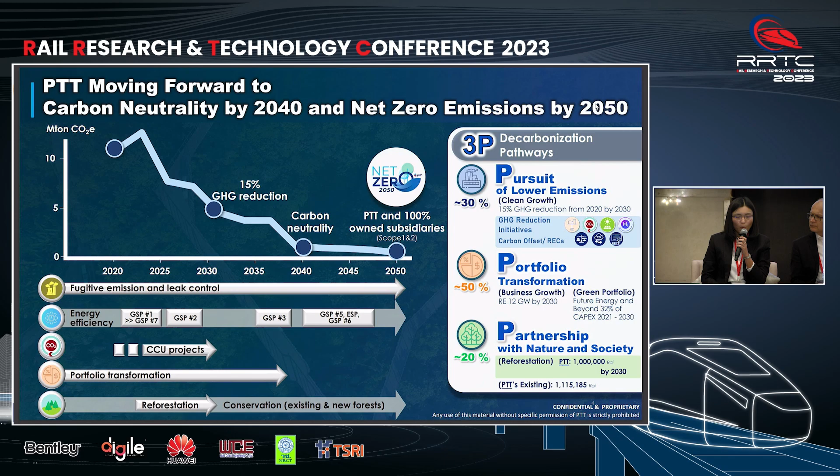And the last one, we would like to be friends of the environment, or friends of nature, with reforestation. We have targets for 2 million rai by 2030, but right now PTT itself has already achieved 1.1 million rai this year.

Coming to the initiative projects that have a big impact in reducing CO2 in our group: the first one is CCS, carbon capture and storage. This project will be a pilot project, starting by 2027, led by the PTT subsidiary called PTT E&P.

Followed by CCU, we try to study ways to utilize carbon dioxide, such as use in valuable products like sodium bicarbonate, animal protein, methanol, and so on, that can make more valuable products for the markets. And followed by renewable energy.

Of course, you know solar is very popular in Thailand right now, and also some wind, combined with clean fuels. That is a very hot topic today, about hydrogen, which can be used as energy for many economic sectors like transportation.

And the last one is reforestation. As I said before, we have targets for 2 million rai to plant trees for Thailand.

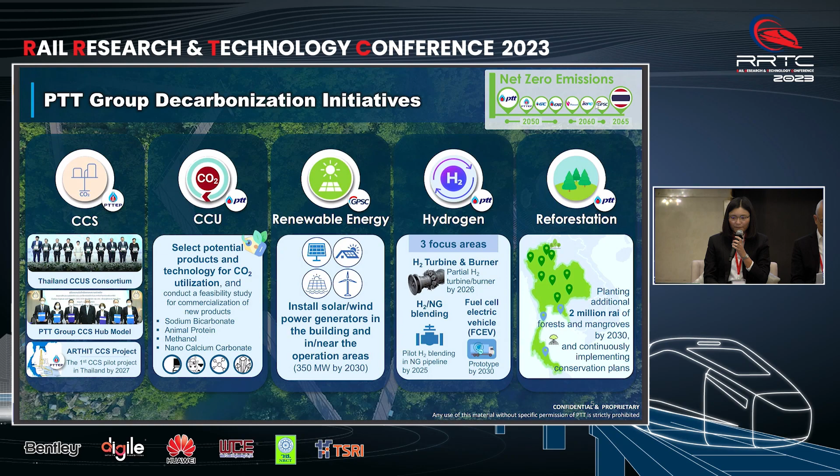This is an overview of the initiative projects, and the PTT innovation that supports the PTT group to launch products to the markets in Thailand. Of course, we are the oil leader in our country, and in this country we are also the leader in biofuels and bioethanol.

The bio fuel produces less CO2 emissions, which is better for the environment. That's why we try to develop this to support existing technology, as well as for aviation.

What we're doing is thinking about biojet, or SAF, sustainable aviation fuel, which is a very important thing to reduce CO2 in this sector.

So we have signed a memorandum of understanding with our PTT group to study, develop, and invest in biojet production in this country in the future.

And the last one is all about hydrogen, which can be used in many applications. Let's come see the detail.

This is an example of a project that the PTT Innovation Institute does for road transportation — testing biofuel tailpipe emission reductions in our company.

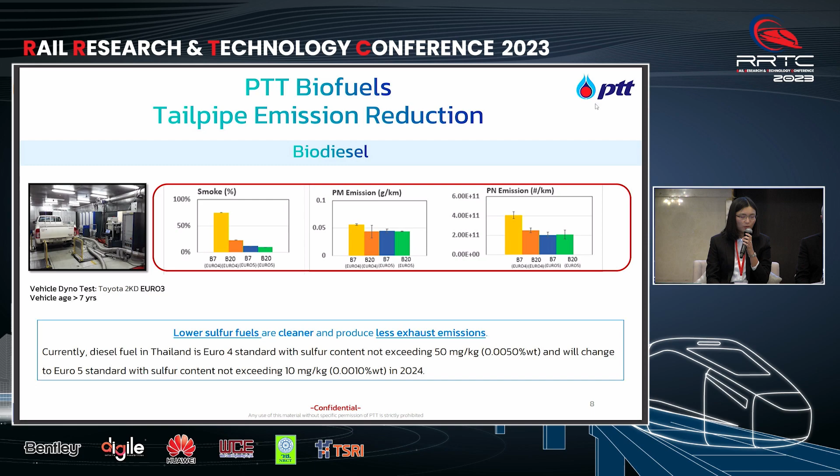This shows you the result. For B20, more bio content means it can reduce CO2 emissions further — about a 15% reduction compared to diesel alone.

Now coming to aviation — we were the first to cooperate with Thai Airways, 12 years ago, to use biofuel produced from used cooking oil, the first in Southeast Asia and in Thailand.

That confirmed biofuel can work with existing aviation technology right now. And this year, because of ICAO standards, the whole world is being pushed to use biofuel for CO2 reduction.

The ICAO standards require the use of biofuel for CO2 reductions all around the world, so the question is how we can provide biofuel in this country.

As I said before, our PTT group signed an MOU to study, develop, and invest in SAF in the future, to support biofuel in Thailand as the region's aviation hub.

Why did we use used cooking oil at that time? You can see the life cycle assessment here — I've highlighted in yellow what we call UCO. The CO2 reduction is about 80% when compared with jet fuel from fossil sources.

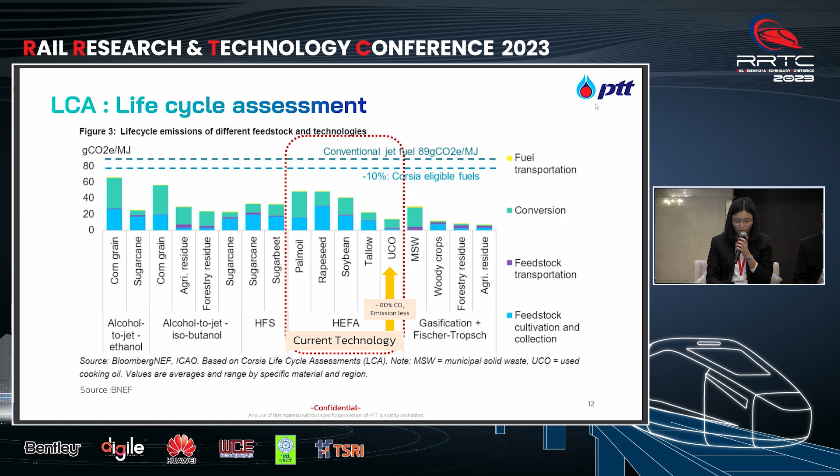For hydrogen, what we're doing is a demonstration project — the first hydrogen refueling station in Thailand, which opened last year in November.

We did this with our partners PTT, OR, Toyota, and BIG. We use the byproduct hydrogen from our refineries, purify it, and supply it to end users.

This is our activity — we have two fuel cell cars in Thailand right now, used at U-Tapao Airport as limousines, so everyone in the country can use them and learn more about hydrogen as a transport fuel.

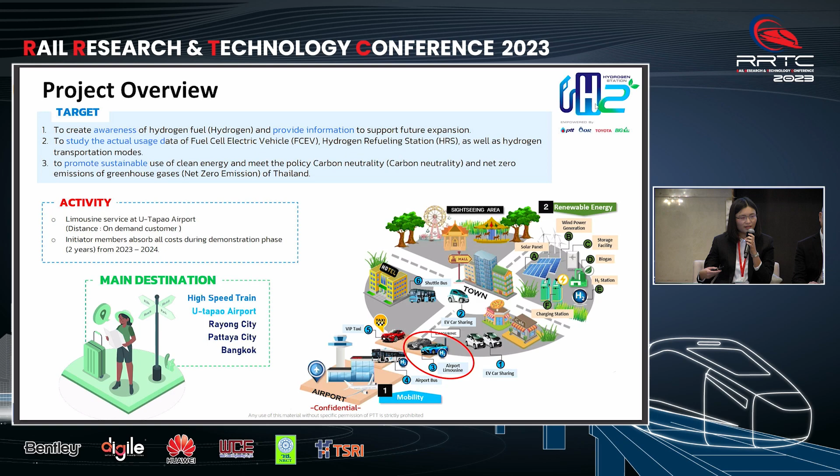Why do we use this hydrogen? Because the CO2 reduction is more than 80% compared to a combustion engine car of the same size, and the CO2 reduction is also better than an EV right now.

It allows a 60% greater CO2 reduction, because the electricity in Thailand comes from a grid mix produced from many kinds of fuel like LNG, diesel, and coal. That's why hydrogen from this byproduct is cleaner here.

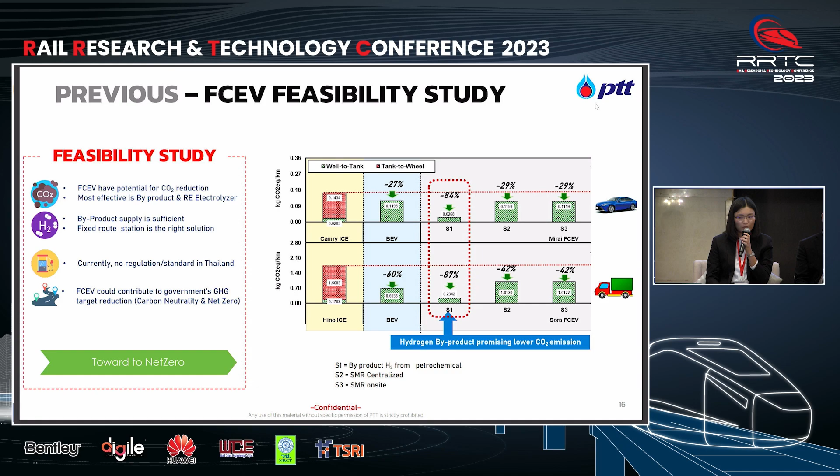And this is the actual usage. As I said, the CO2 reduction is much greater, but for the current state, as shown on the last part of this slide, you can see the CO2 reduction from total hydrogen usage.

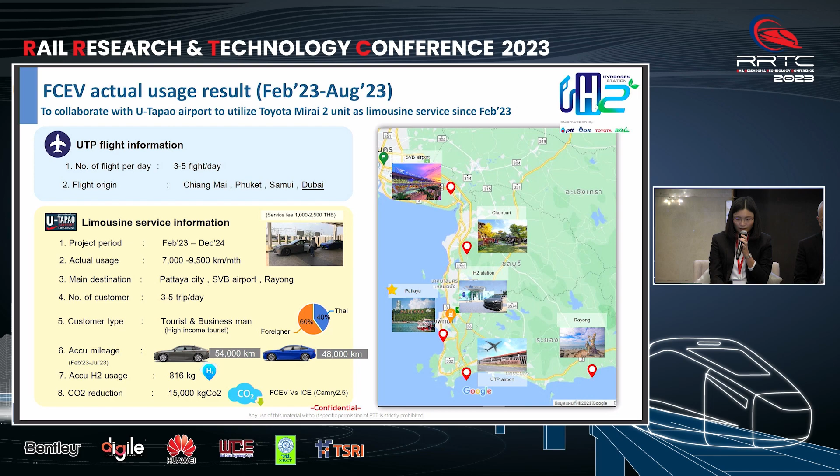We use a total of about 800 kilograms of hydrogen for operations since February, which means we can reduce CO2 by about 15,000 kilograms.

And coming to the last slide — what about the railway sector? We try to support low carbon intensity fuel that matches current technology, so railways in Thailand can use B20.

So we still have a couple more minutes to take questions on the PTT part. Very nice timing, by the way. Thank you.

First of all, I would like to ask, probably the first question will come from me. I would like to ask about the biodiesel fuel that PTT is currently supplying to the State Railway of Thailand. Is it the same kind of B20 that we also provide to trucks at the gas station? Yes, it's the same. But at that time, for B20, we did this as an initiated project before it rolled out to the whole country.

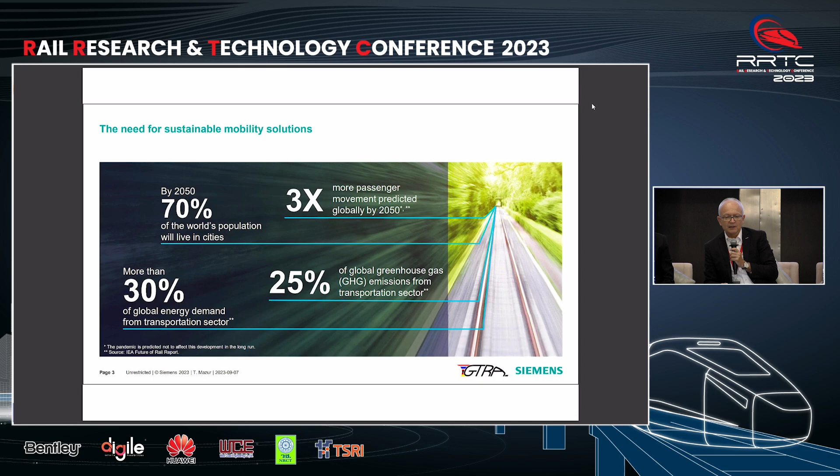Greenhouse gas global emissions will also be increasing in transportation if we don't do anything. Some of you saw yesterday's presentation from Katrin Luger of the UN. This 25% contribution of transportation is concerning, but everyone has to contribute to zero carbon or neutral carbon emission. So the UN defined these sustainable development goals, and everyone, including all industry and mobility and railway, is following this demand.

And what is happening on the German side, by the way? If you look at German companies like Siemens, compared to operations in 2019, it's not only about operating and reducing greenhouse gas emissions, it's about how the entire operation, including the manufacturers and the industry, is becoming carbon neutral. We are always looking at the end.

Battery-driven trains, hydrogen trains - but what's happened before? We never look at them. Please, this is the opinion of Thai-German colleagues, not my opinion only, because we are not just saying what's convenient - we have to talk about the truth. The truth is we are only coming to the end point.

We want to electrify EVs in Bangkok - would that solve the traffic congestion? Change all cars on the street to EVs - would the traffic move in Bangkok? Where is the energy coming from?

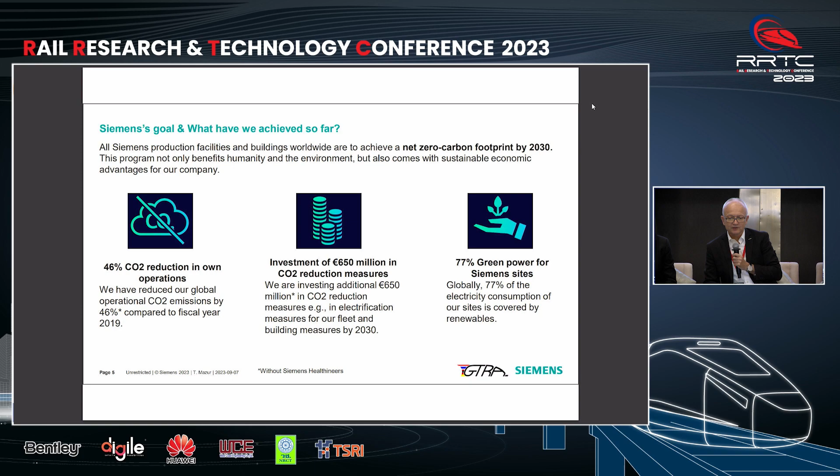But now coming back, this is not only on the manufacturer side, on the user side. To achieve that, the authorities are required. The interfacing must be balanced by authorities in terms of economics, environmental impact, but also social impact, because this is also important, and to ensure seamless, safe, reliable operation for transportation.

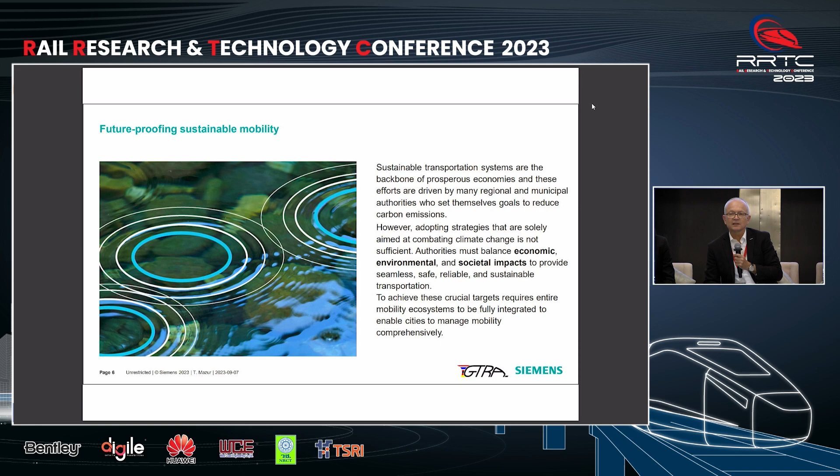That means the complete mobility ecosystem has to be taken into account, enabling profitable operation because operators want to earn money, saving natural resources - we are talking about the energy, where it comes from, and how to use that energy efficiently, promoting a shift to public transport.

Katrin Luger spoke yesterday about that, how to attract people to use railway for example. And we spoke today with one of the organizers - he is not here, she is not here - she said she used the car, but she could have taken a BTS train, but she didn't.

I said, oh, you have to come to this session to hear about that. But there was always an excuse. She said, I have an excuse because afterwards I have to go 40 kilometers in another direction, I don't have a train. How do we attract this lady, and ourselves, to use public transport? It's not so easy.

Look at yourself - are you willing to use rail with the solutions you have here? For that, you also need a technology provider for the railway infrastructure - turnkey business, rolling stock, rail services. But what's important is an intermodal solution, software, where the means of transportation must be given but also connected online.

We are not talking about Google Maps, that's not enough. We are talking about something optimizing usage of resources. Resources are given, but very often the operator says, I need more trains because I cannot accommodate passengers. Why not go for dynamic, flexible timetables, allocating resources where they are needed?

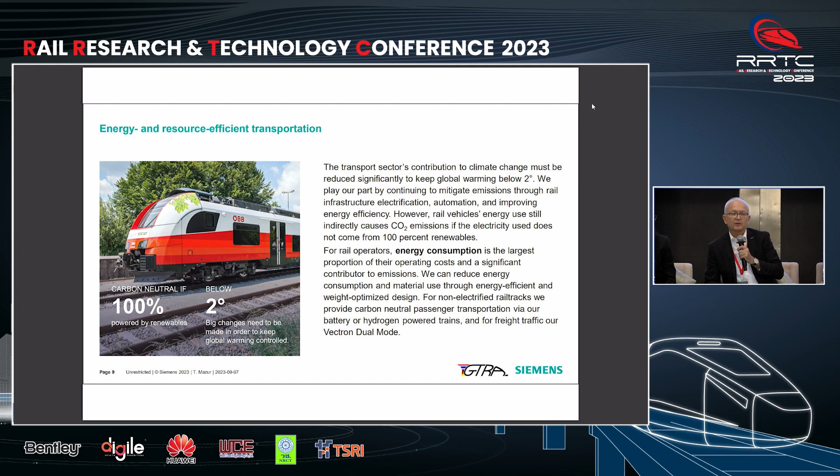So here you have an example, by this model you see 100% in Austria - Austrian railway achieved, by the Railjet, 100% neutrality. Those trains are 100% powered by renewable energies. Very unique, and we know to achieve this reduction of global temperature increase, we need to go for carbon neutral mobility.

Example from new technology, high speed. In the first room, they are discussing high speed again, but new models are required, not the traditional train running today. New technology, lighter construction, different car bodies, more optimized in terms of consumption.

30% of consumption is Velaro Novo, by the way, which leads to a reduction of more than 1,000 tons of CO2 per train compared to the traditional high-speed trains running today, and less investment because it's getting better. The same for the locomotives.

You see also new locomotives. This is dual mode locomotives, diesel, electric. You say, why diesel again? If you go to Germany, only 60% of the network in Germany is electrified. 60%. And this is a liberalized market.

If somebody gets a concession to operate and has to operate two different areas, electrified and not electrified, he invests in a diesel train and runs it on electrified tracks too, because one day he has to go on a not-electrified track. What does it mean? He's polluting permanently. But having this dual mode, he can change the operation mode depending on whether he's on the overhead catenary or going into a non-electrified area.

And in this way, the operator is also reducing emissions. You see here, 950 tons per year and train compared to the traditional diesel. That will be the solution, not only biodiesel, but also having this dual mode. It costs more money, by the way, but it pays off.

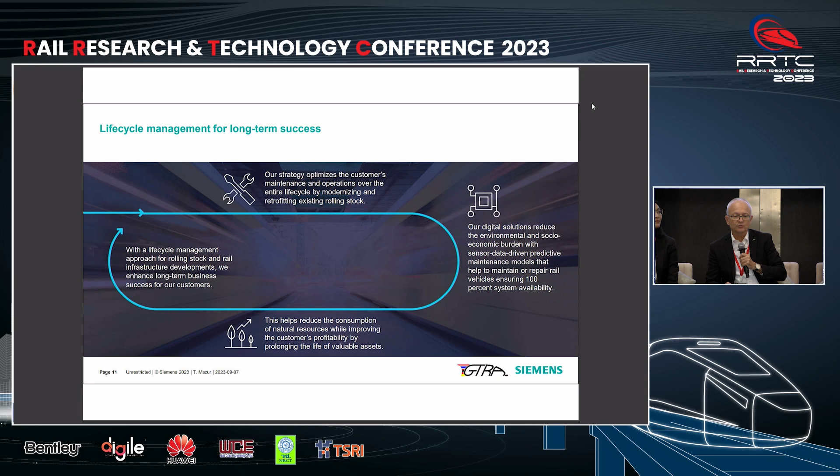So that means we ensure life cycle management from manufacturing, digitalization, connectivity, operation, providing the respective solution. We have to look at this picture in a holistic way, not one-sided.

One more example. Here you see Velaro as a high-speed train. This is still the traditional train, which is not as optimized as Velaro Novo. But you see here, the Spanish operator introduced this Velaro high-speed train running between Madrid and Barcelona, for example.

And today there is no air traffic anymore. No, you cannot book any plane because those trains are much more reliable. You need less time, less cost, and of course high efficiency. But this can only work when you convince the passenger to take the train, and they're convinced because of 100% availability.

Yeah, it's incredible. The planes have delays, you have to wait, you're in the airport, you're busy, you take your coffee first, second. Here you're sitting, you take your coffee while traveling, and you see the demand by passengers increase very clearly. This pays off and we have less carbon.

What else? Digitalization. In the middle room here, we talk about digitalization because, remember Katrin Luger, without digitalization we cannot make mobility carbon neutral.

Optimization - here we're talking, for example, about interlocking, the optimized way of connecting on demand, utilizing resources in an optimized way, sending the trains in the most efficient way from A to B, but also interlocking in the cloud, for example. Digitalization allows us to go to the cloud. It's always a question about cybersecurity, but this is manageable.

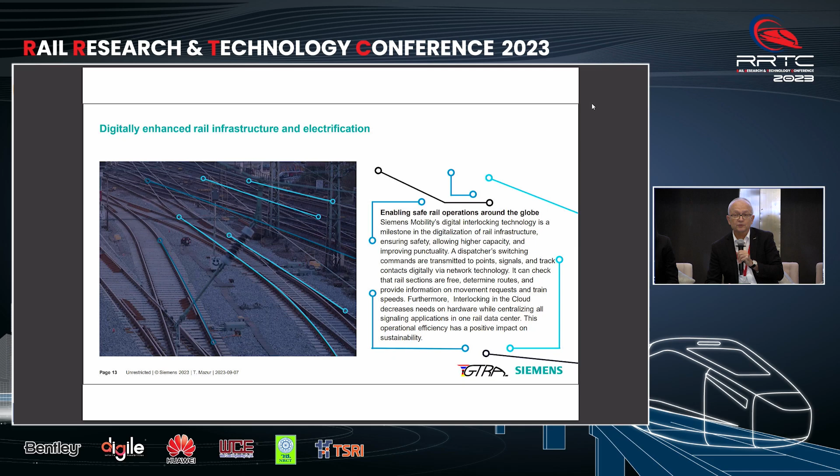So that means improving efficiency, also automated operation. Also this ATO, which you know from the metro here in Bangkok for example, goes to the main line where you decrease headways, where you optimize the operation.

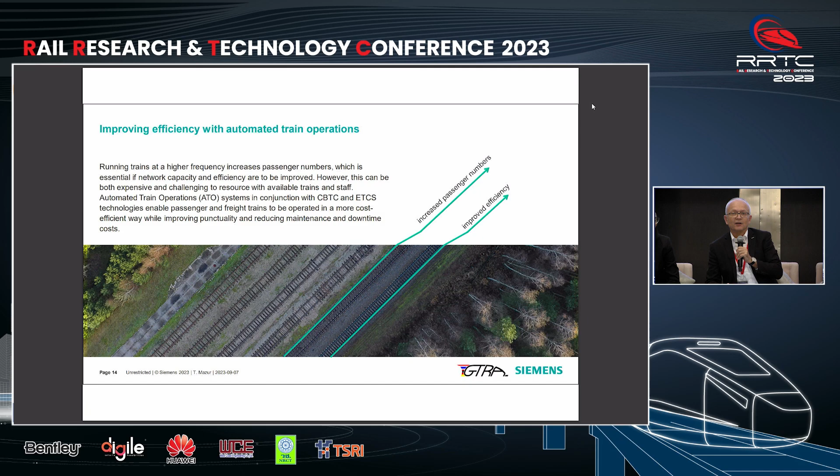Also for traffic, for passengers, but also for freight, by the way. It's interesting for freight when a lot of trains are running, and the majority of the economical value is in freight. But then also, how do you convince passengers to use it? First, you build the options to cover all the means of transportation, but connect them properly. And this is mobility as a service.

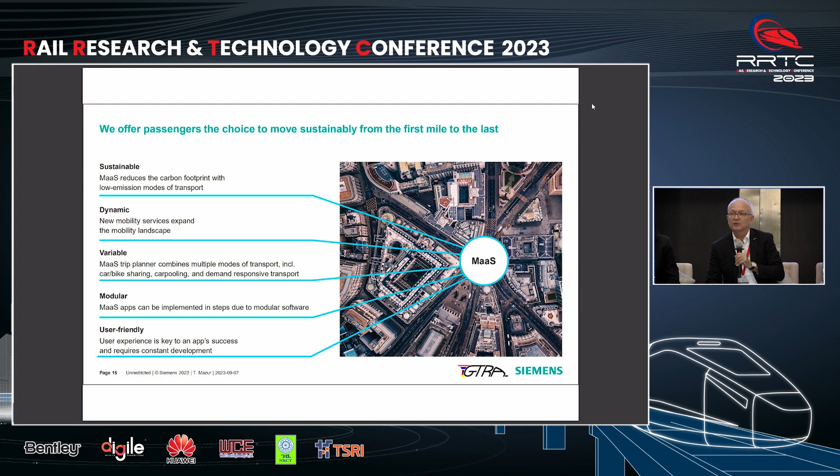And here we're going for digitalization. I believe I don't need to elaborate. The discussion here is on the right side.

It's unavoidable, and also, once again, coming to energy generation, power generation, biodiesel. But look, it is very clear - even in Europe, solar power plants are used, for example here in Sacramento, a factory in the US, but also in Vienna, in other manufacturing plants we use our own power plants where we generate renewable sources.

And again, sustainable future, sustainable future. You see here, we consume resources of 1.5 globes today, and we will continue to 2, 3.

You see the statistic from the UN if you look exactly at that - that means we are wasting our resources. We are consuming what our children will need. Tell your children that you use what they would need in the future. You consume, you tell them, I take your oxygen today, tomorrow you have nothing to breathe. Explain that to them.

We are doing all this, and also we, as we are sitting here, are not doing differently, because we are talking about permanent end solutions, EVs in Bangkok. But we take only these examples, not talking about the complexity - we are talking about a part of alternatives, but not about the full complexity.

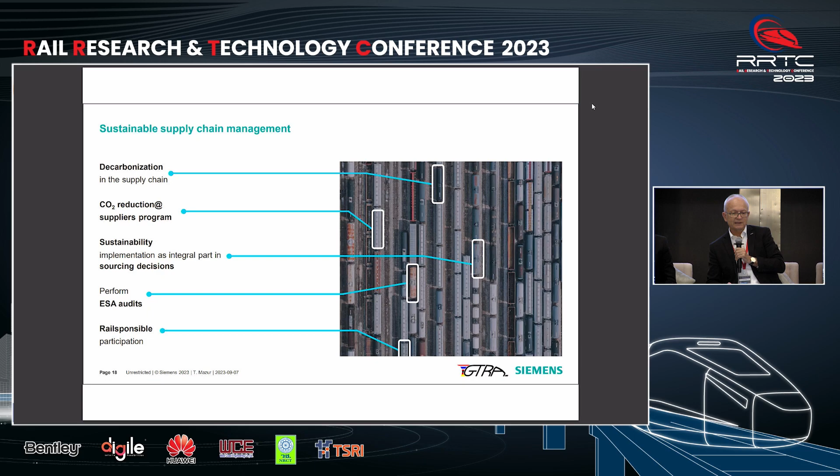Sustainable supply chain management - here we have to force our suppliers to take this, and who can enforce it if not the German Thai Railway Association, for example, enforcing all the suppliers in Thailand or also internationally to follow this stream, to be sustainable also. That means we have an obligation - not only saying we are manufacturing clean, but we are buying products in our supply chain and utilizing service providers which are not clean.

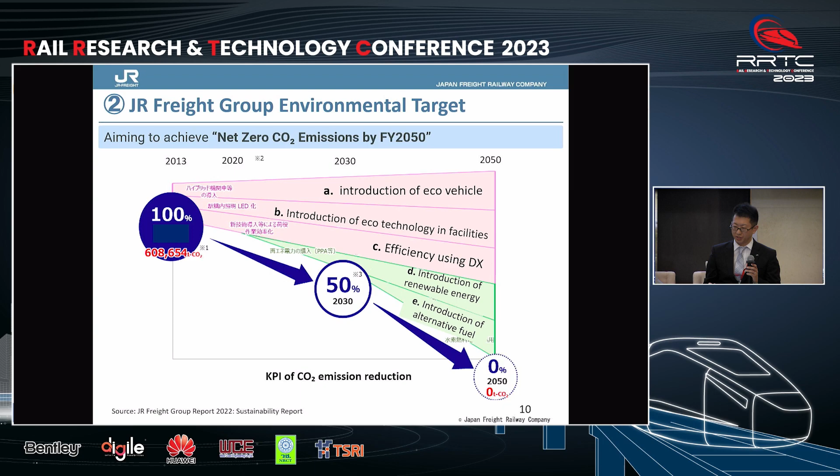I will introduce activities from A to E - actually A to D. First, the next slide: first is locomotives.

In general, in most countries, railway operators simply select and purchase locomotives from manufacturer catalogs, like Siemens catalogs. But JR Freight has been working mainly with Japanese manufacturers, and we develop railway rolling stock by ourselves with manufacturers, for example Hitachi or Toshiba.

For example, this is an example: the left one, shunting locomotives - we spend a long time idling while waiting for the train to arrive. For this reason, we developed a hybrid locomotive named HD300. It combines a small diesel engine and a large capacity lithium-ion storage battery.

Next one is for shunting, and next is the diesel locomotive for main line, named DD200, the center one. It complies with Japan's Tier 2 engine exhaust gas regulations, and we use inverters - a hybrid silicon carbide element with high power conversion efficiency.

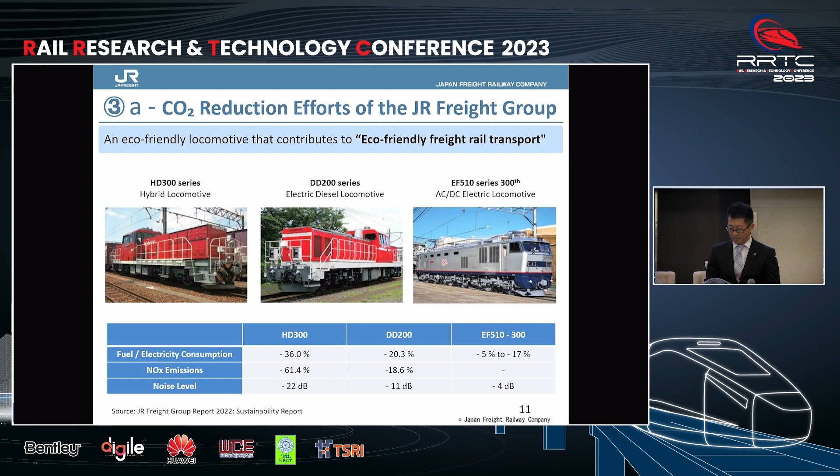But in Japan, we mainly use electric trains because the passenger company has electrified about 70% of their main lines in Japan. So we produced a new version of locomotive, the EF510, which is newly equipped with AC regenerative braking to reduce environmental impact. And next is in the freight station.

We use forklift equipment to lift on, load on, and load off, unload from wagon to wagon, our containers. And we use forklifts with low CO2 emissions. Some freight stations are in urban areas, so we introduce soundproof forklifts for the urban area.

We also use biodiesel fuel, but it's not diesel. It is made from edible oil and euglena. Now we use it only for trucks within freight stations, not the main line yet.

Lighting is also used in freight stations in Japan. We operate freight stations 24 hours a day, 365 days a year, so we need more and more electricity for lighting. So we are currently replacing mercury lamps with LED lamps.

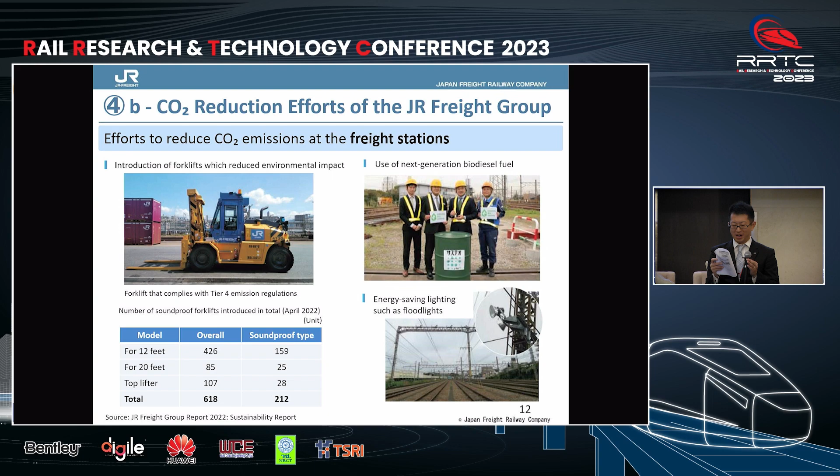Okay, next. Next one is our future.

By collaborating on advanced technology, we are pursuing labor savings and operating efficiency in freight stations. So now we are developing systems such as truck platooning within the freight station, forklift driving support - now forklifts are driven by humans - and remote control of shunting locomotives. Some initiatives such as a truck driver application are actually working in our freight stations now.

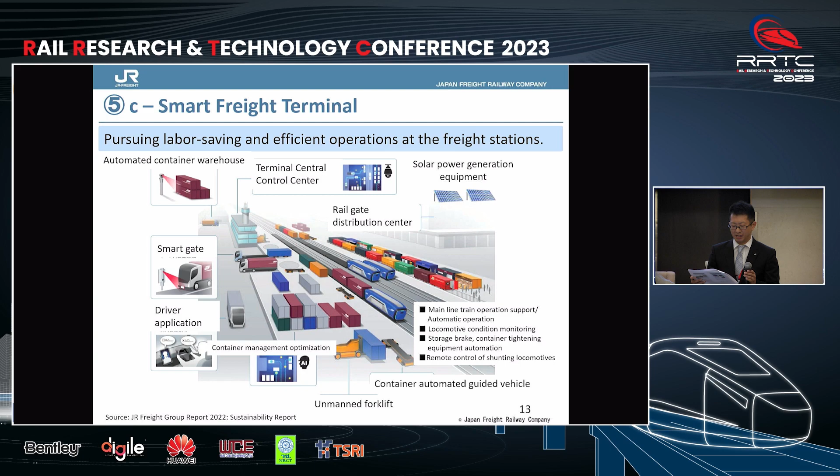And not only using electricity, we now create electricity at our facilities. For example, renewable energy covers the entire amount of the common area during daytime hours at our warehouse named Tokyo Railgate East, which exists at our freight rail station in Tokyo. And not only our main company, our group companies work together to introduce renewable energy. We have so many idling lands, so we need to make use of them.

This is another activity, not a technology. In March 2022, we issued our first corporate bond named Green Bond. Our bond has two types of issue date, 10 years and 2 years. The issued amount is each 10 billion Japanese yen, so almost 70 million USD.

Green bonds are bonds issued for green projects, such as I mentioned, Tokyo Railgate East, the warehouse. We developed a green bond framework for green bond issuance, and our framework received the highest evaluation from an outside organization.

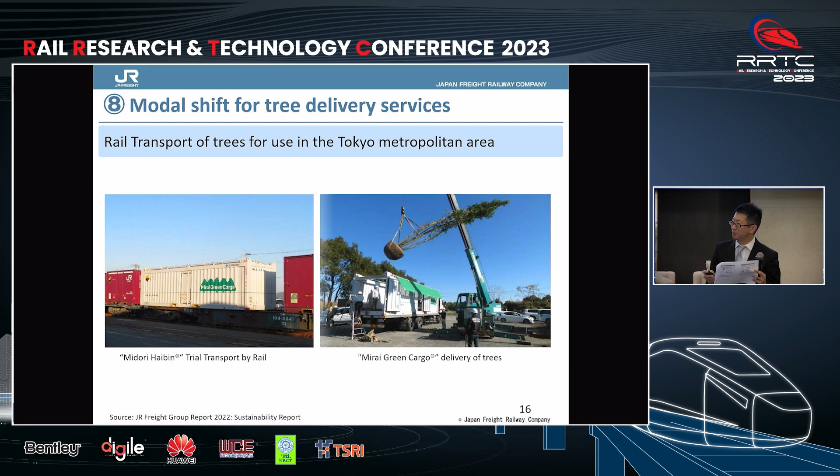Currently, 187 products are certified, and also almost 100 companies are certified. So if everyone exchanges business cards with me, you can see the Eco-Rail mark on my business card.

And JR Freight is also a sponsor, so we participate in promotion events held across Japan. We are promoting environmentally friendly freight rail transport. So if you purchase a Japanese product in Bangkok, for example snacks or drinks from Japan, you can see this Eco-Rail mark.

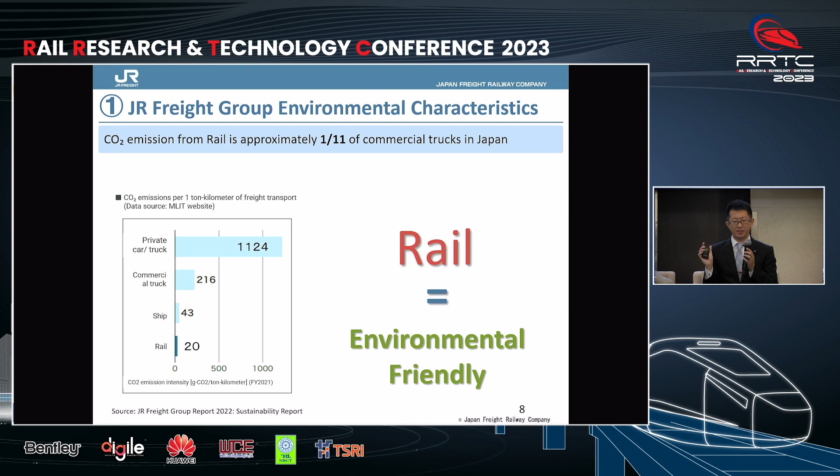Thank you very much. Good question. I think there are two factors for this graph. First is what we use - for example, for trucks or ships, we use oil.

And on the other hand, for rail, as I mentioned, in Japan almost 70% is already electrified. In Japan, electricity is produced from oil, coal, and nuclear. But for rail, JR passenger company provides electricity to JR freight. Several passenger companies have their own power plants—coal power plant, oil power plant—and also, because Japan has so many water disasters, they have dams, and water falling from the dam produces electricity.

Sorry, hydropower electricity. Yes, this is clean energy. This is one factor why the rail is environment friendly.

And the second factor is efficiency to transport. Our train can transport almost 50 containers. But a truck in Japan can transport only one container. In Thailand, maybe one or two containers, but in Japan only one container. We can transport almost 50 containers. This work efficiency affects this result.

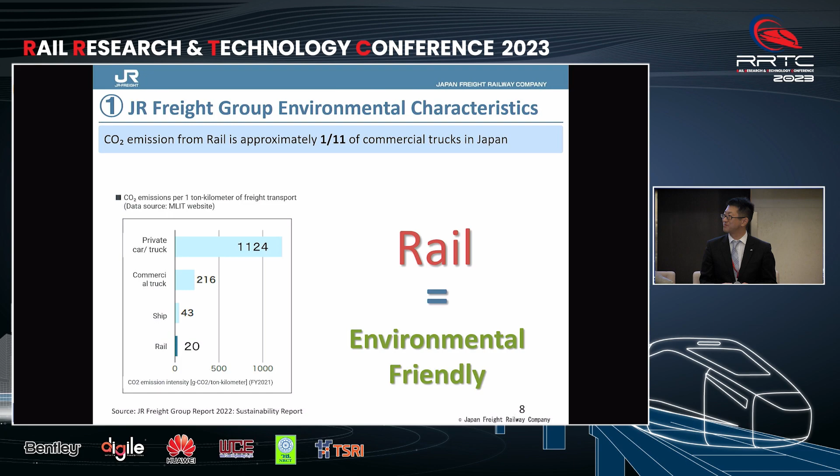Today I would like to talk about hydrogen technology for rail transport decarbonization, because our topic is about decarbonization. Right now, global warming is a big problem for the whole world. So Thailand, we have the target to be carbon neutral in 2050 and net zero greenhouse gas emission in 2065. In order to do that, we have to reduce carbon emission by 40% in 2030.

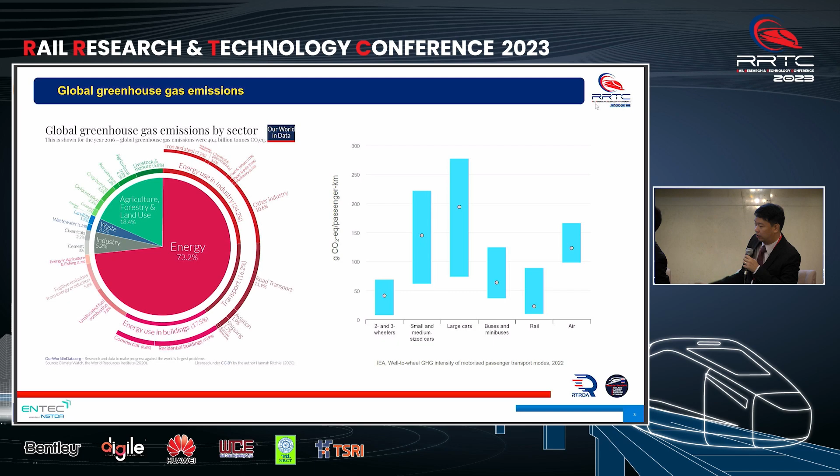So I will talk about hydrogen. Why hydrogen? Currently we produce energy from oil, coal, and natural gas. In order to produce that energy, we produce carbon dioxide as a byproduct, because it's a hydrocarbon component. In the future, as Dr. Saranya from PTT said, hydrogen could be the future energy, because if we can produce energy from hydrogen, it is cleaner—the byproduct is just water. So there's no carbon dioxide in the hydrogen bond.

For the IRENA study on major technologies for decarbonization, hydrogen is one of them, but it's not the majority—the majority is energy efficiency and renewables. But hydrogen is one of the main technologies that can be used for decarbonization; it will take out about 10% of the carbon dioxide. Each year, right now, we produce about 37 gigatons of CO2. This is a big number, so we don't have only one solution that can reduce it all.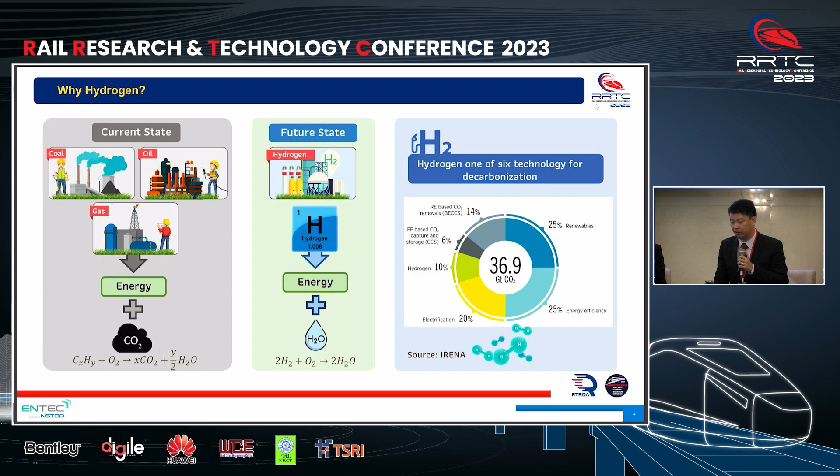Some solutions might be suitable for some cases, so we need to study the way to decarbonization in many methods, not just one way. Hydrogen can be used for many kinds of applications—it can fulfill the energy sector, and it can be used for industrial and transport as well.

The hydrogen can be used as a fertilizer with ammonia, and it can be used as a reducing agent for industrial purposes as well. If we have too much hydrogen, we can put it into the gas pipeline and burn it as fuel, or we can use hydrogen to produce electricity from a fuel cell.

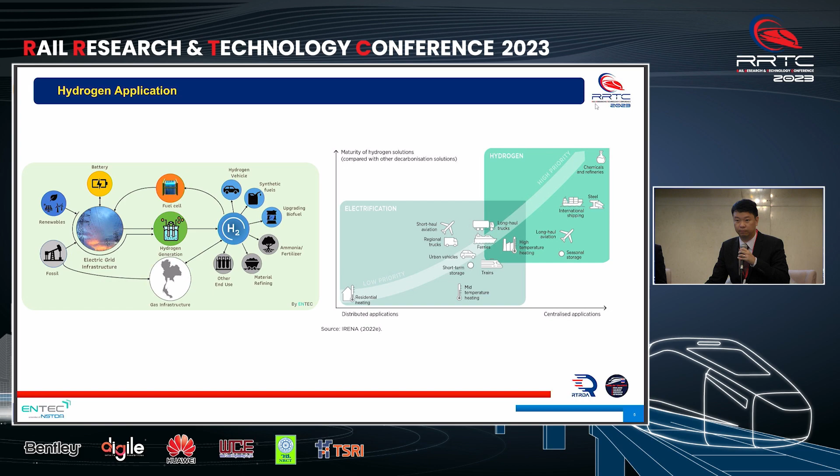The trend is kind of in the middle - should we go for electrification or should we use hydrogen? I think it depends on the area. If the electrification route already exists, we should go with electrification. But what about the route or railway where there is no electric? I think hydrogen could be the answer for that.

Especially for Thailand Railway, we have almost 4,000 kilometers of rail route, but we only have about 4% electrification. It's just only in the Bangkok area. So Thailand is very behind many countries.

We are not advanced in electrification rail. So right now we mostly use diesel electric trains.

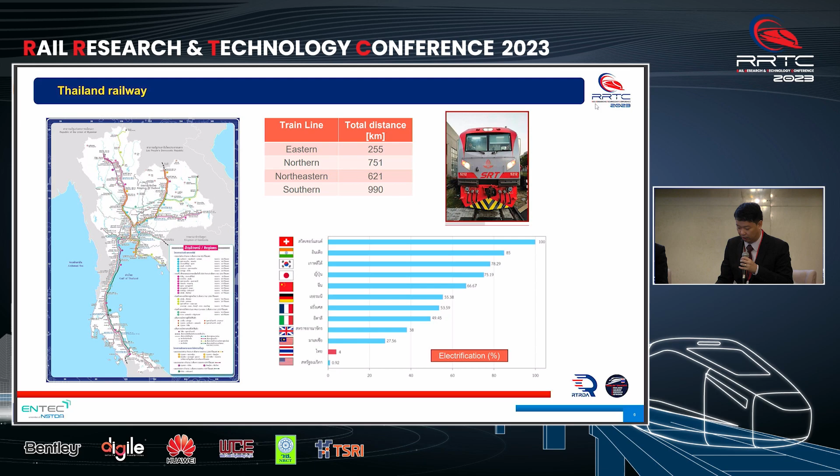So for the green power train, right now I will present two green power train methods. The first one is hydrogen power train, and the second one is battery power, from EA. The first one is hydrogen power from Alstom in Germany. It can run about 600 miles or 1,000 kilometers.

So the range is comparable to diesel electric for a single tank of hydrogen. But for the battery train, the range is quite short - about 150 to 200 kilometers - and it uses quite a big amount of battery, about 4 megawatt hours.

As Mr. Somad said, if we use a lot of battery, how are we going to deal with it when it's not being used, or how can we recycle it? Because if we use too much, we'll have a bigger problem for recycling the battery itself.

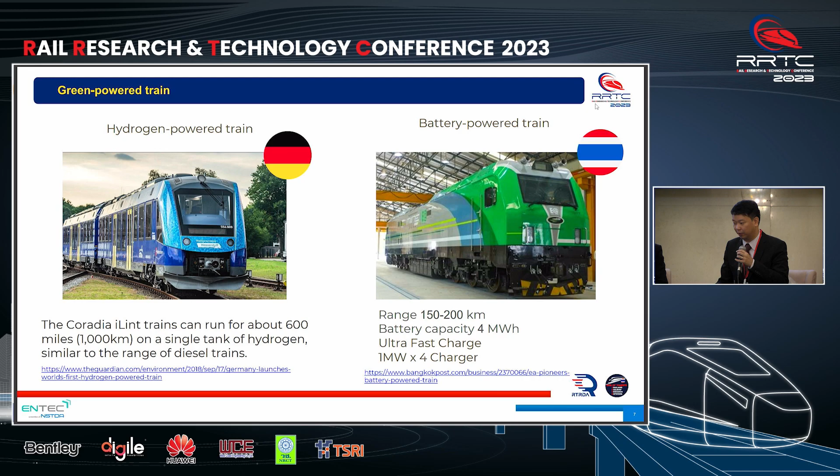So actually, we can use it in many modes, like dual mode or something like that, to reduce the amount of battery we need, and use it to transfer between electric line and non-electric line.

But the problem in Thailand is that it's just only 4% electrified, so this is still not a viable solution for Thailand, but it is good for other countries for switching between non-electric and electric routes - using battery when not on the electric route.

Since I'm not a train expert, I'll show you a comparison of fuel cell electric vehicle and battery electric vehicle instead. If you compare between the battery vehicle and fuel cell electric vehicle, I think it's similar to the train, but the scale is bigger. The battery vehicle right now is for small, short range use.

I think it's a better solution for decarbonization, but for longer length you have to increase the battery, and the battery itself is very expensive right now - it's half the cost of the vehicle. If you increase the size of the battery, it's also very heavy compared to other types of fuel.

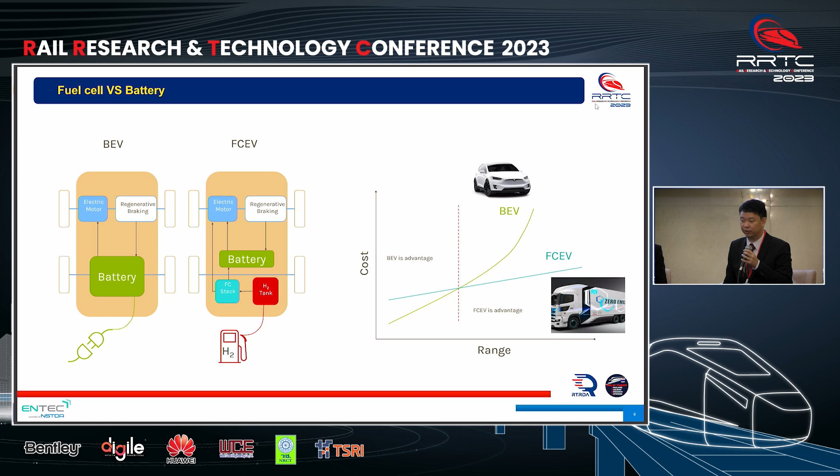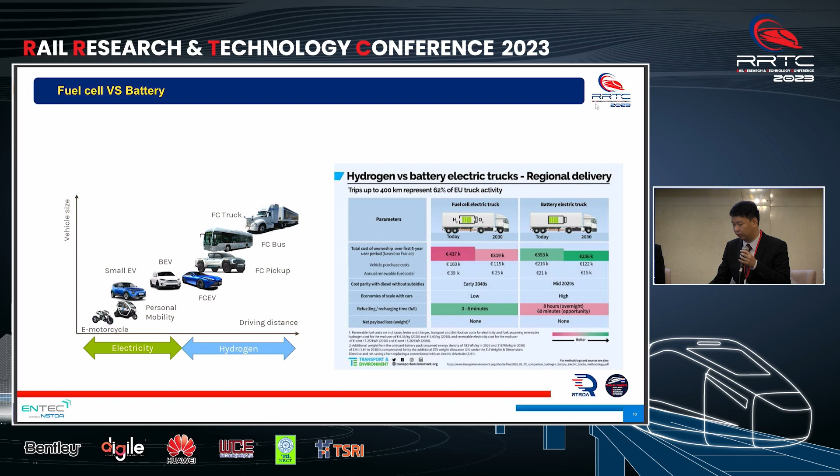But for the larger one, for the train or something like that, hydrogen could be used for that, because hydrogen powertrain is already used in public operation, like in Germany. And the green hydrogen can be used. The green hydrogen can be produced from renewable sources like solar or wind. Right now the hydrogen technology already proved that it can be used for the longer transport network.

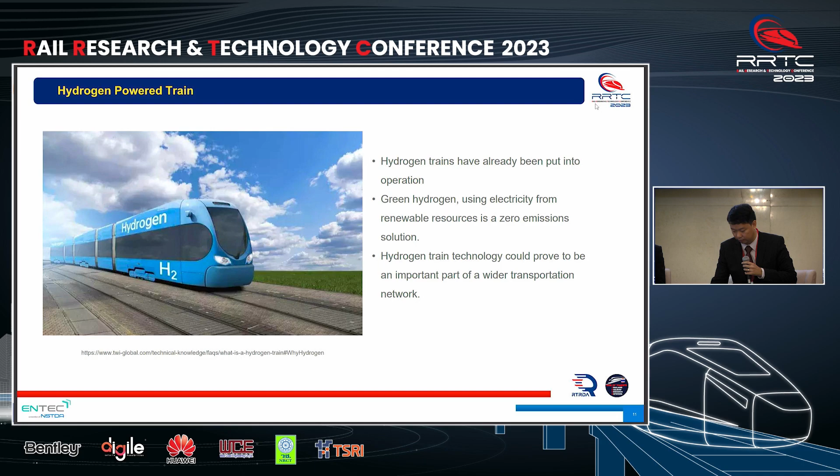For the hydrogen conversion, right now we use the diesel electric vehicle. We can use the fuel cell system instead of the engine to provide the power, or we can still use the ICE engine and change the tank from the diesel tank to hydrogen tank, so we can feed the hydrogen into the ICE engine, and it also can be run.

But these two applications have their own pros and cons. The fuel cell electric has higher efficiency, but the problem is the fuel cell stack and the system itself is more expensive. But the ICE engine has been proved for a century that this is the most robust engine for sure, and it's easier to convert. But the problem is the emission, because you're burning the hydrogen with the air, not oxygen only, because the air has nitrogen and it can produce NOx, and NOx itself is not only a greenhouse gas emission, but it's also toxic gas as well. So we have to be careful about this one as well.

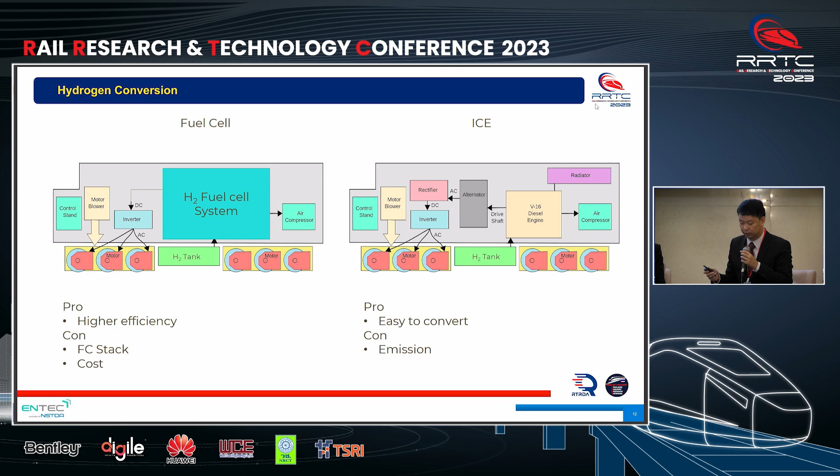So how to make the train zero emission? I think for the hydrogen train, it has the advantage because the train has a fixed route, so we don't have to create many more hydrogen refilling stations, and it can be retrofit, and it has the same range as the diesel electric, and it's zero emission, and it's also very efficient.

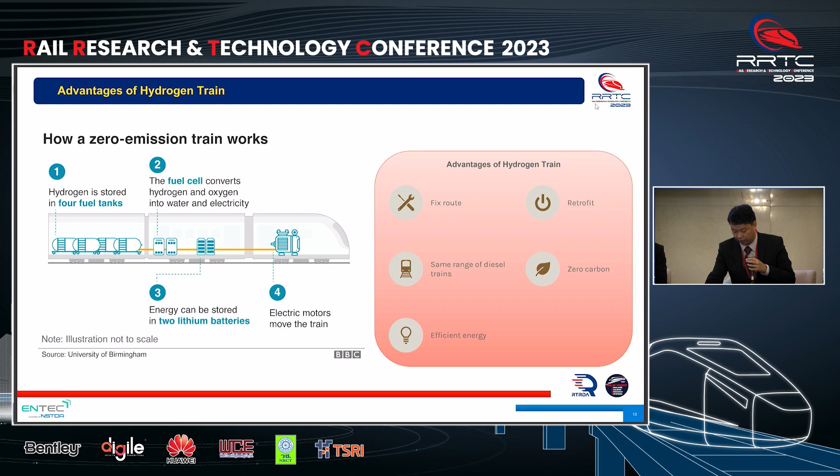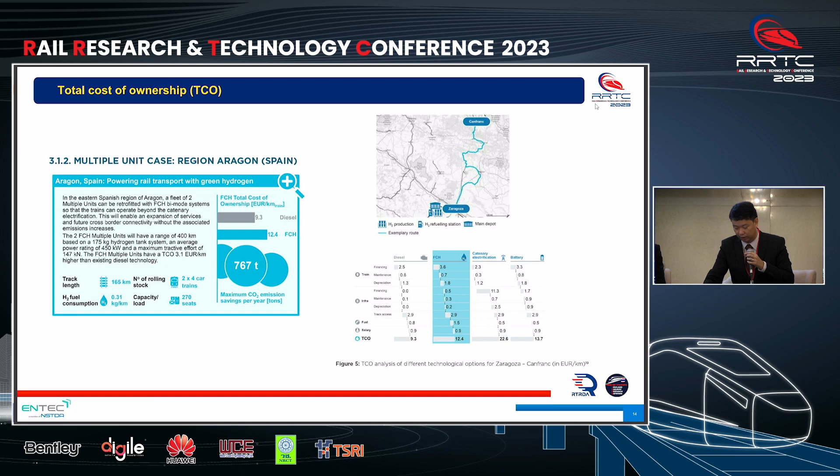This one is the example for the total cost of ownership, so how much does it cost if we use different types of rail transport. This is a case study from Europe, from Spain itself, and you can see that the fuel cell is still a little bit more expensive compared to diesel, but it is cheaper than the catenary electrification and the battery for the train, because even though the catenary is cheaper for fuel cost, the cost to invest to build the electrification line is very expensive, something like that.

And this is just the last slide for the conclusion. So I think the rail sector should be, must be decarbonized, so we have to use green technology for better decarbonization. Either we use the green energy source, and I think the green business is also an opportunity. Battery power can be used for short range, for the non-electrification line, and it can be used for switching between the electric route and non-electric route.

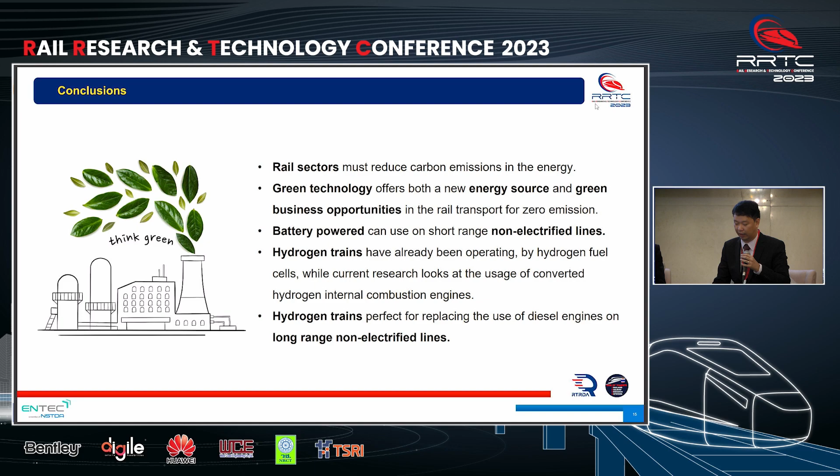Right now hydrogen can already be operated, and the hydrogen fuel is currently under research that we have to look for, because we have to look at the whole picture — even though hydrogen does not produce carbon dioxide when you use it, how you produce the hydrogen matters, whether you produce hydrogen with carbon dioxide or not. That is still the main challenge we need to figure out, how we can make enough green hydrogen, or how we can transport the white hydrogen, something like that in the future. So thank you.